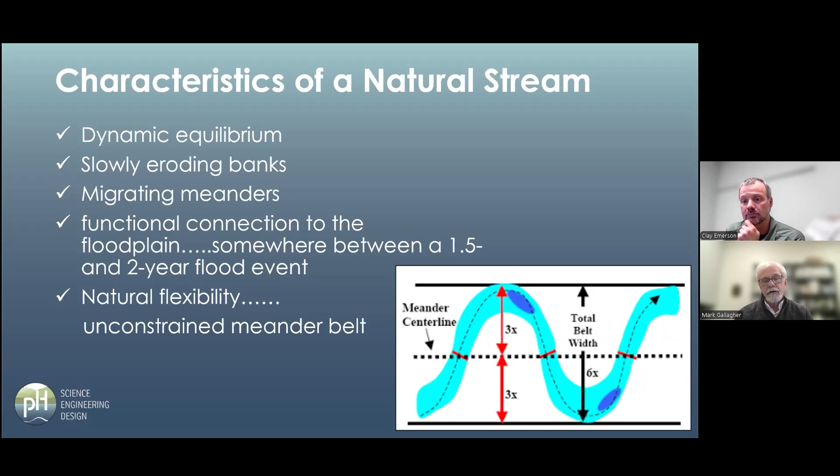Closer to home, Philadelphia has a number of these enclosed streams, which many, like 100+ years ago, they just built these somewhat engineering marvels to enclose streams that run through Philadelphia. And again, one of the major points here is it facilitated the movement of water from upstream to downstream as efficiently as possible.

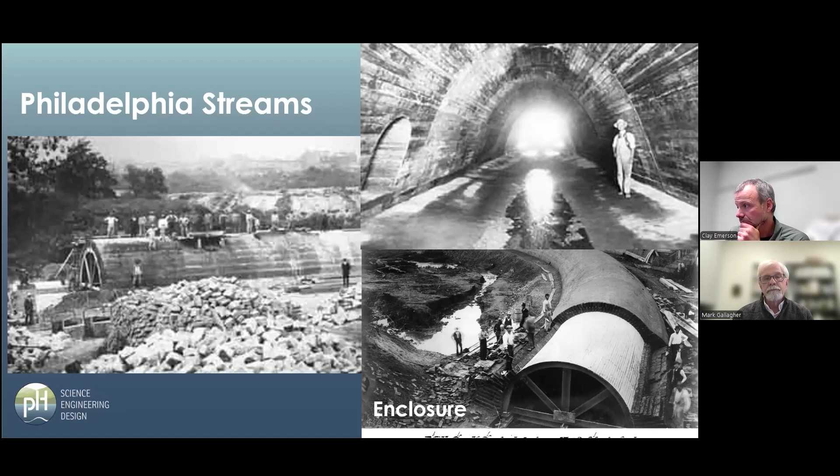We've dammed many of our rivers, which impact fish passage, impacts water quality, impacts sediment getting to our estuaries.

Legacy sediment is a problem in many parts of Pennsylvania, just from historic farming and forestry. That sediment has accumulated in floodplains, and the disconnection between the stream and the floodplain is many times due to the accumulation of legacy sediment.

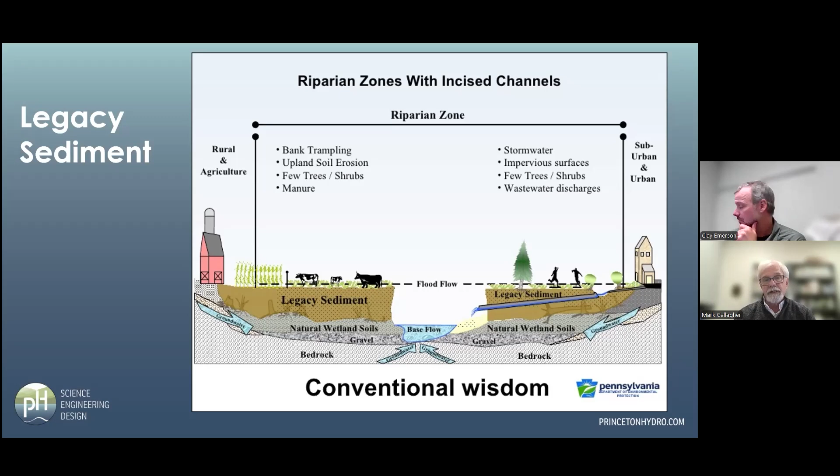In urban streams, of course, with any urban stream, the best thing to do in the past was to fill the areas in, the wetlands or floodplain adjacent to. This was a common practice to create more desirable land by eliminating wetlands or filling in the floodplains to create developable land adjacent to streams. And in many cases, just filling in the stream like you saw with the pipe stream in Philadelphia.

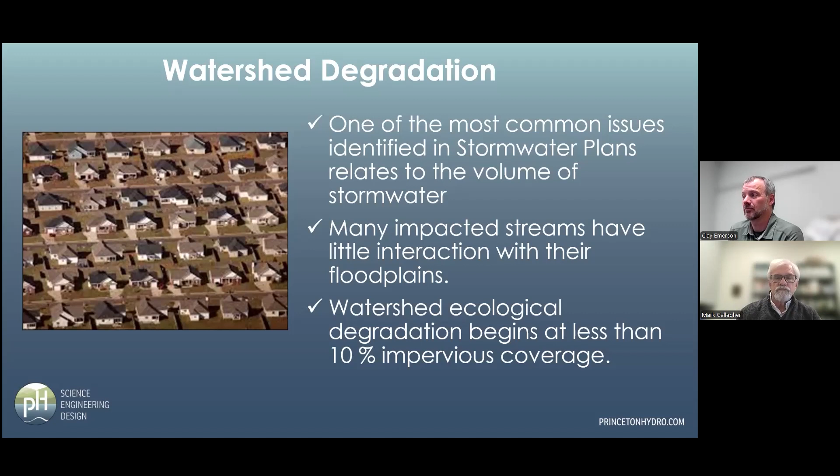I'm just going to go through a lot of the little things that are like death by a thousand cuts. Even now, Pennsylvania does not regulate streams that drain less than 100 acres if there's no adjacent wetlands. This is a headwater stream in Bucks County that had some development issues, and DEP just said it only drained 75 acres, we don't really care.

Those are the kind of issues - those headwater areas really provide the foundation for the streams below them, and that's really where all our streams form. Losing those headwater areas creates a domino effect, where everything after that is worsened by modifying those headwater areas.

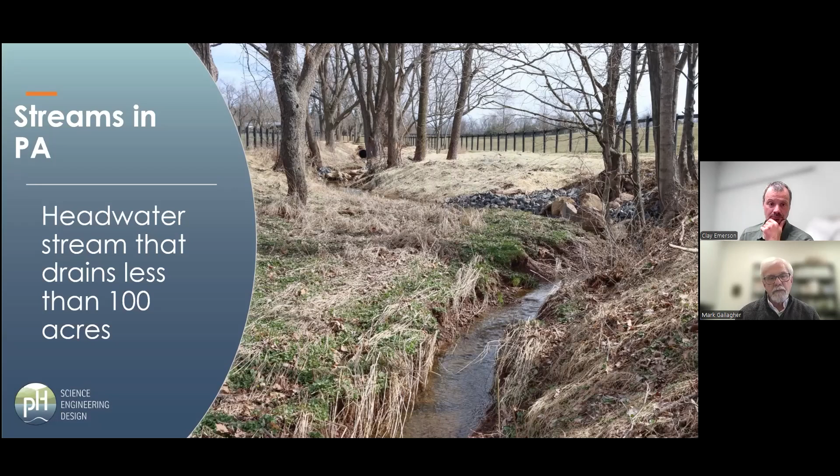This is one just outside of Washington, D.C. One of the things that is really a clear telltale sign is anytime you see roots growing in the air - that represents a loss of soil. Roots don't grow in the air. So for those roots in that tree with the pink flag on it, that 3 or 4 feet of root extending out over the stream channel - the bank used to be at the tip of that root, and all that soil is gone. In this case, in the Chesapeake Bay, just that amount of soil alone...

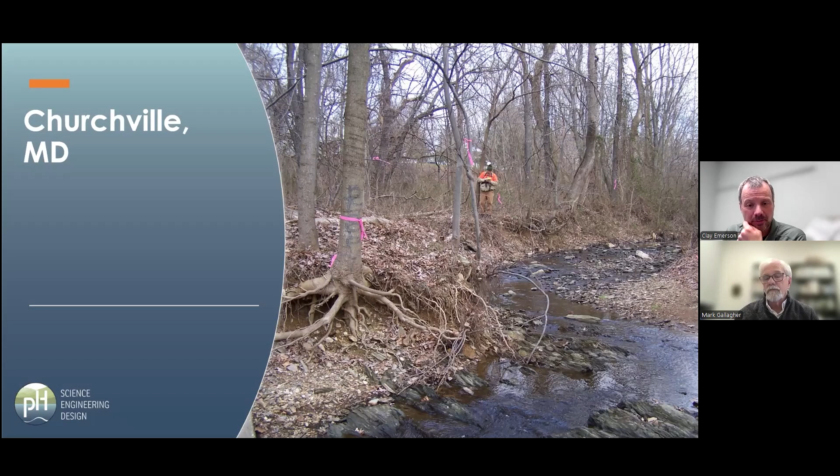That's when we start to talk about nutrient problems in our receiving bodies of water, like lakes, ponds, or bays in this case. In this example, you can see that stream is downcut all the way to what looks like a bedrock outcrop in the center.

Just another example of downcutting, and again, this is related to that issue of excess stormwater volume.

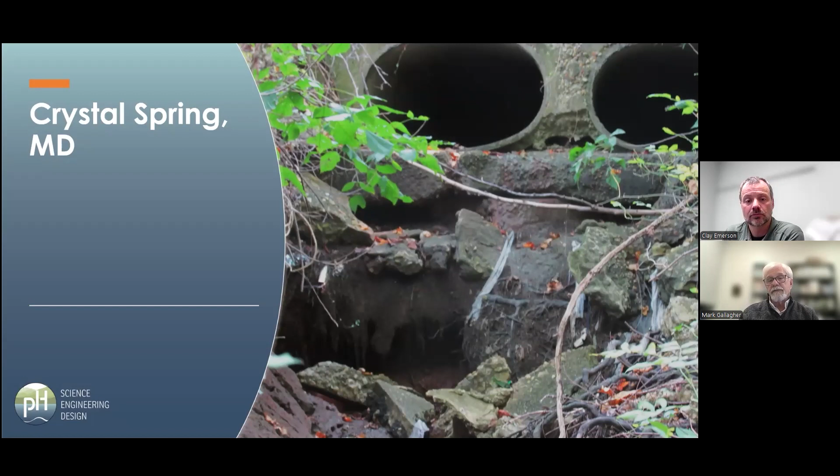This is a common practice or common scene - we design these culverts and put riprap scour protection at the down-gradient side of the pipe. But after a number of years, it's not uncommon to see that those areas have eroded and that riprap or stone protection is gone. In this case, it was probably a 4-foot drop from the end of that pipe to the stream channel.

So this is what I was saying, that excess volume has made a lot of our stream channels very unstable, and the meandering is not slow anymore. It could be pretty rapid as they try to find a way to stabilize themselves, either by dissipating that energy by deepening the channel or widening the channel - in some cases both.

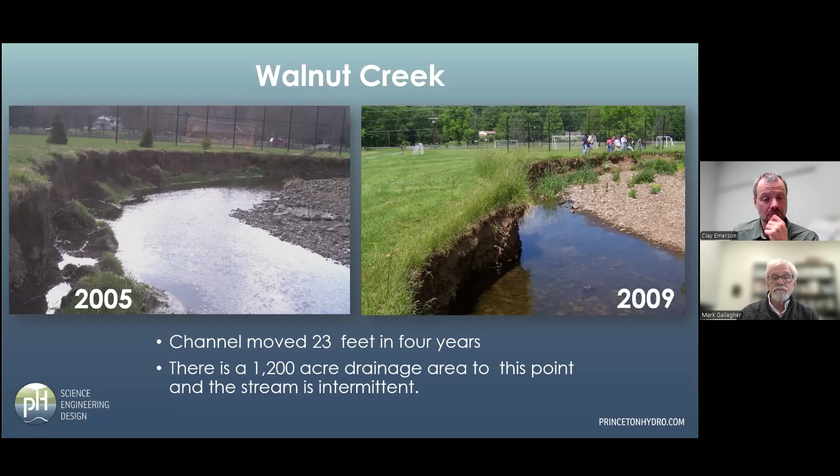So that brings us to the question of what we can do. I'm going to hand this off to Clay, and he's going to talk about some ways you can help reduce the volume of runoff that gets to the streams, and how even property owners doing little things can help reduce that volume. Later we'll talk about some restoration methods to reconnect streams to their floodplains.

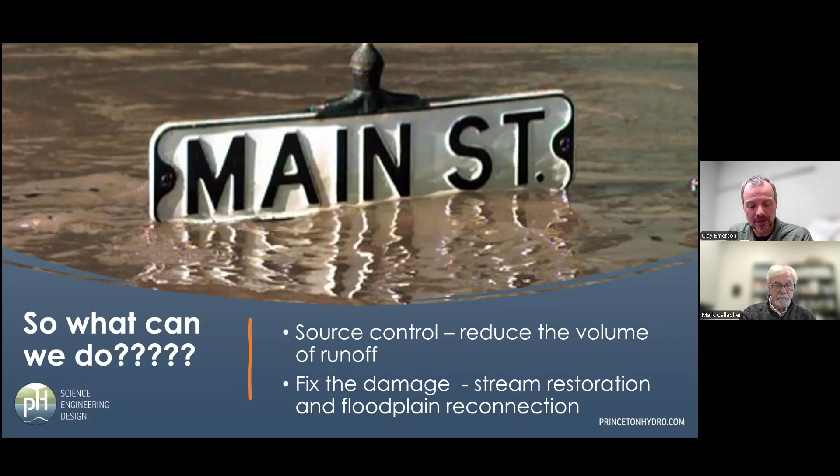We think that functional infrastructure doesn't need to look like a basin or a concrete box. You'll see a theme in these later projects of really trying to use the form and function of natural systems to achieve these goals.

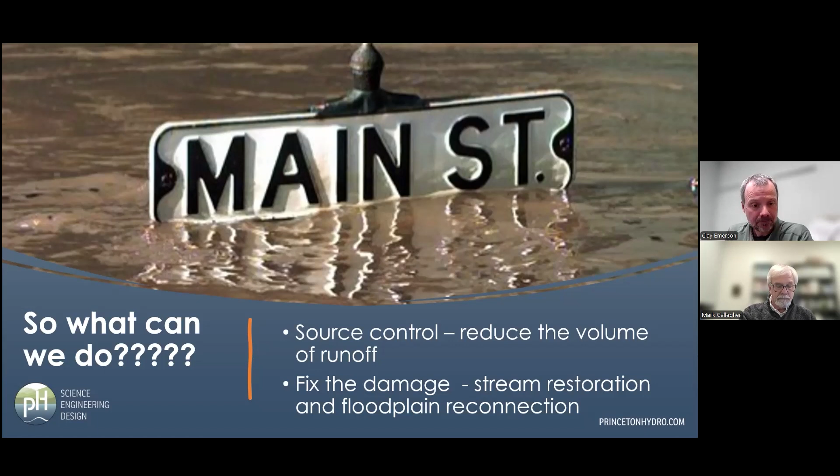I like to talk about the evolution of stormwater because it ties in with what Mark said about the volume of runoff. In just our lifetimes, we've seen this transition or evolution of stormwater management, at least in Pennsylvania and the Mid-Atlantic. We went from piping runoff directly to the stream, getting it there as quickly as possible.

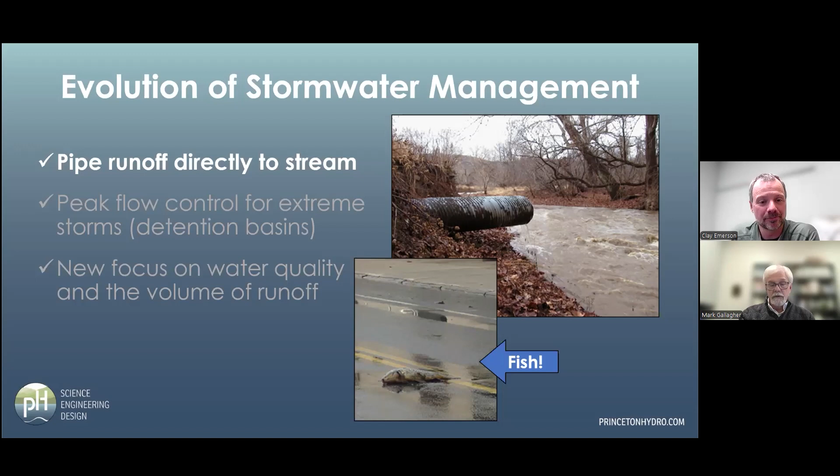So it encompasses everything—it's got the source of the problem and the effect. A friend of mine took this in Manayunk, a little downstream from here. We now have a new kind of roadkill: a common carp that didn't make it across the road. So what do we do about it?

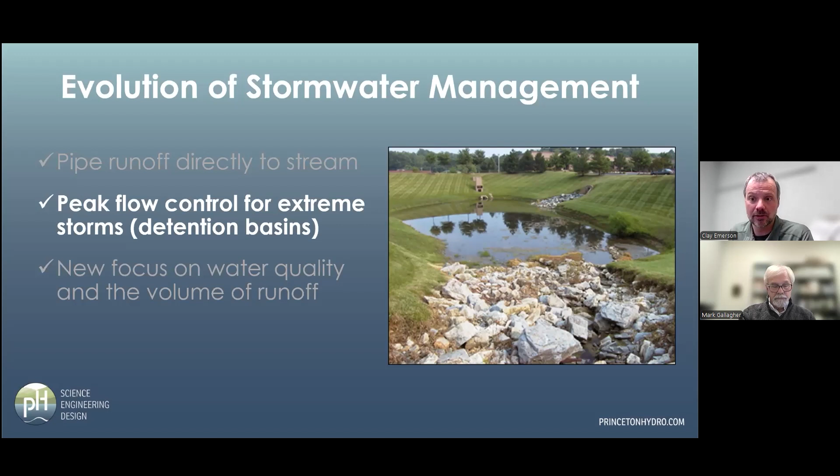This problem was recognized in PA, and I won't belabor this too much. This probably isn't what you necessarily want to hear, but if you drive around your community you'll see a lot of large stormwater basins—this is one in the Valley Creek watershed—built to meet regulations that don't exist today. We have much more comprehensive regulations now, but these started popping up in communities in the early 80s, maybe even a few in the late 70s.

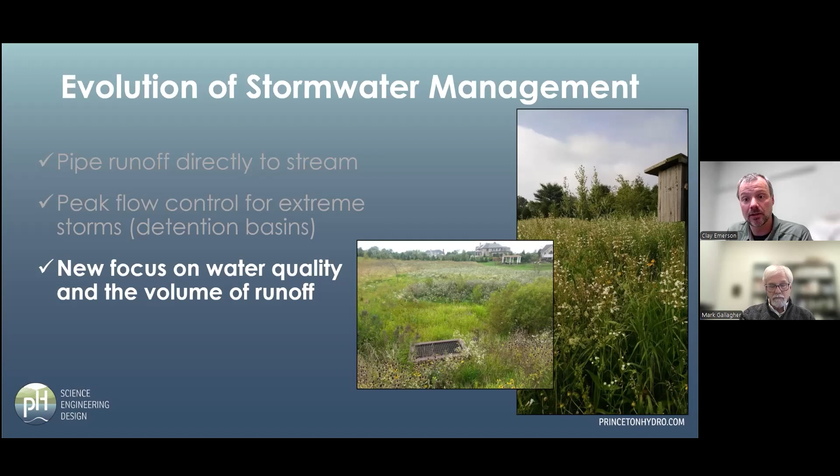But we have a new focus on water quality, and most importantly now we have rules and regulations, especially in Tredyffrin Township, that require addressing the volume of runoff. This is an example project in Chester County that, again, is a basin, but to the property owner and adjacent neighbors, they can't differentiate this stormwater basin from a natural meadow, which is what they wanted. It still does what it's required to do, and it does it better than a standard basin would.

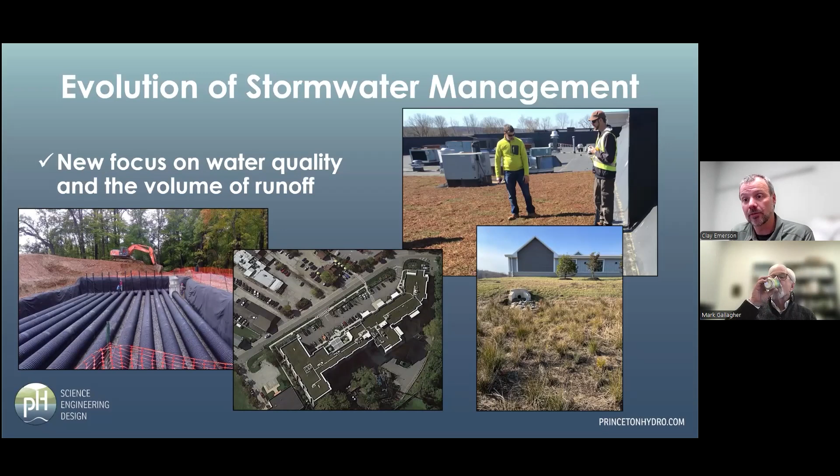One of the things Mark pointed out in that earlier slide, with the basin in the foreground and the couple large homes some distance apart, is that we've all kind of become riparian property owners. And I don't mean that when you hear the term riparian property owner, you think of someone who lives along Valley Creek or some waterway—though that's certainly what the word riparian means.

But if you look at this little screenshot of a portion of the township, the network of roads—whether it's the more dense townhome development or the more typical residential development throughout Chester County—there is always a series of inlets, curb and gutter lines to inlets to pipes, perhaps to basins depending on the age of the community.

And there's often a piped discharge to the stream, because that's generally how things are designed. So the suburban landscape that we live in and enjoy shows evidence of this evolution of stormwater that I went through in the previous three slides. Here you can see a forested riparian buffer of sorts, and you can tell there's a stream meandering through here, but there are a lot of outfalls along the way.

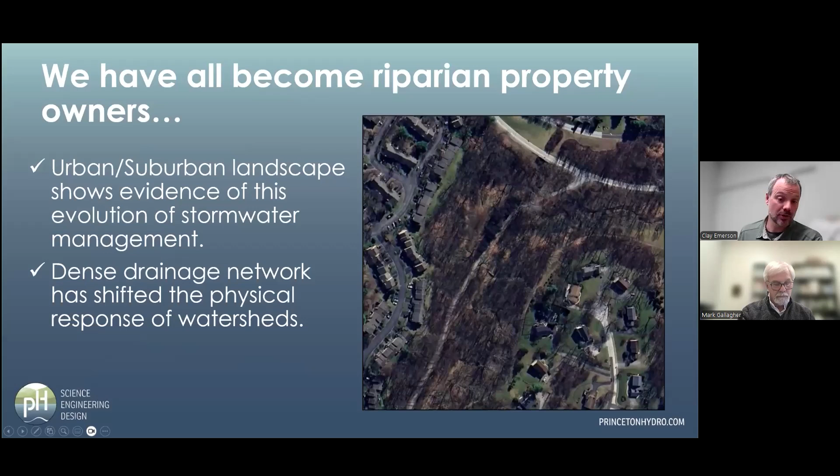So, downspout disconnection. In the previous image, I pointed out a home—I don't know if you can see the pointer here—but if this person's downspout currently goes into their driveway, which goes straight to the street, it never has the opportunity to infiltrate. Simply redirecting a downspout can break that connection, and in the smaller typical storms, maybe that runoff will never actually make it to the stream. It will be allowed to infiltrate. Everyone's heard of rain gardens.

I tried to pick some examples here that didn't include those. I'm a big fan of rain gardens, of course, but I tried to pick some different examples that you haven't seen. Yes, you can build a rain garden, you can probably do it yourself—there's a lot of good guidance out there on generally how to do it, plant selection, and you've probably, if you're on this presentation, seen one of those before.

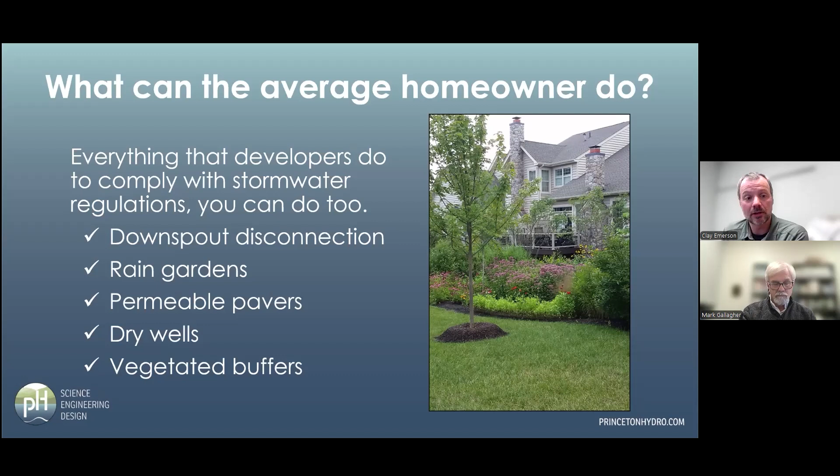But there are other things—some more structural, or improvements like permeable pavers, dry wells, vegetated buffers. I should point out, I mentioned the Tredyffrin Township ordinance before—even smaller on-lot developments, depending on how much impervious cover is proposed, are also required to do stormwater management. So in a lot of communities, including Tredyffrin, even small improvements at the lot level will actually require some of these things.

Here is a really nice, quick, self-contained example of a more developed area in your community in this part of Chester County. You have areas that are more similar to some of the images Mark showed, typical lower density suburban landscapes, but you also have some semi-urban areas, like the Paoli section and other areas. So you can do things there too.

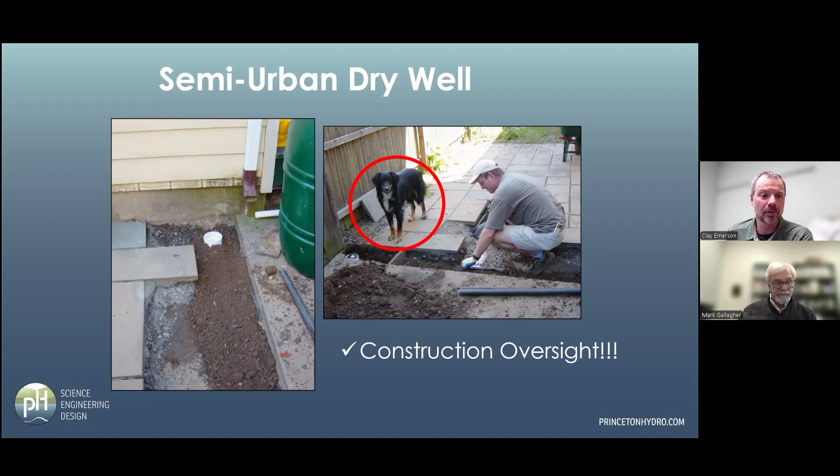Importantly, this homeowner has construction oversight, making sure things are done right, as this person here is connecting their downspout to a new drainage pipe and taking that runoff away from the foundation and basement, and putting in any number of different manufactured storage units that just makes a place for the water to go temporarily.

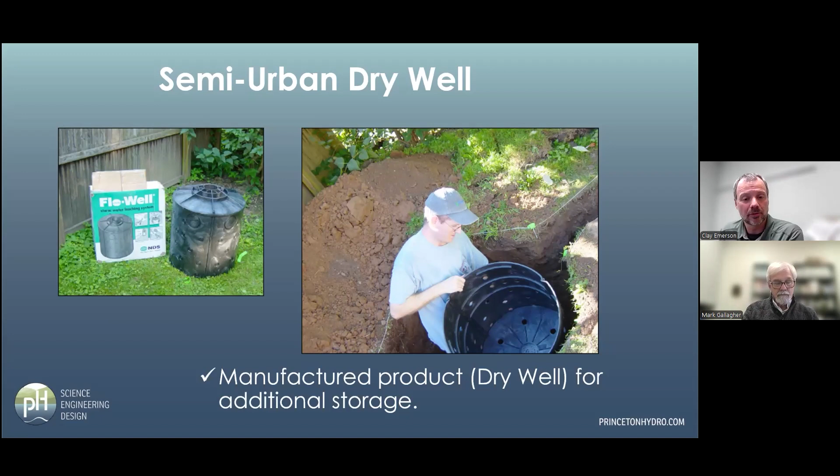So rainfall from the rooftop that used to go to the patio and probably create an issue there, especially in winter, on days like this, now goes underground to this empty space before the storm system that allows it to soak into the ground in between storms.

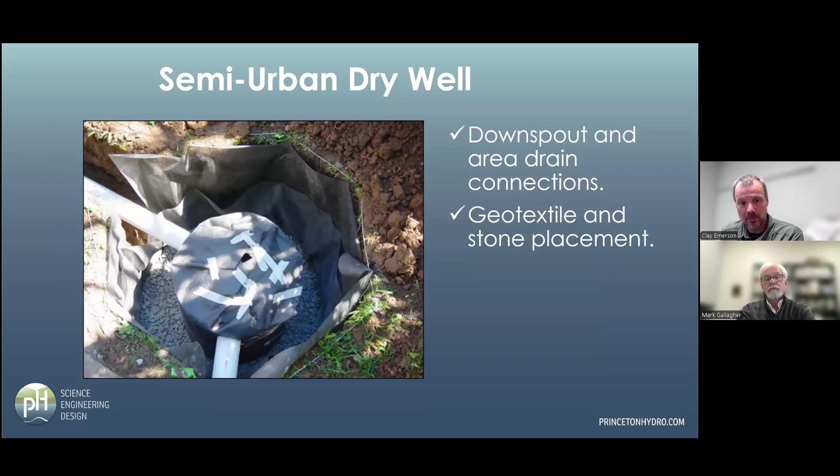In this case, this person in particular is kind of adventurous and did this himself, but it's not a terribly heavy lift. Just a simple series of PVC pipes, collecting that water from the downspouts, bringing it to this subsurface system, some fabric, some clean stone, and you can get an idea of the scale there.

Yes, these things can be sized. They do need to have an overflow. There's some other design considerations, but anything is better than nothing. If you're installing one of these because you have to, then the sizing is obviously much more important and would be carefully dictated and reviewed.

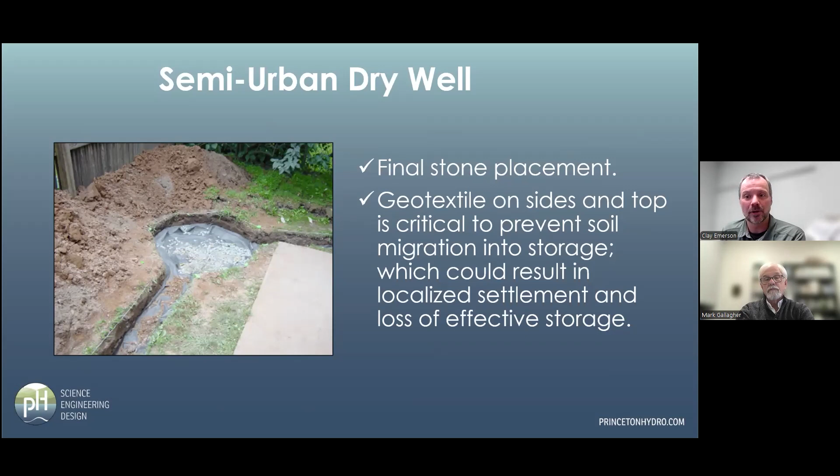But it's a simple process. It's not rocket science, it's some basic pipe. It's not much more than a trip to your local hardware store.

Permeable pavers. In this instance, a kind of unsightly old standard concrete patio is being replaced with permeable pavers. If you haven't seen these, this is a close-up of them on the pallet, and you can see they're really just regular pavers, made of the same material as standard pavers. The only difference is they have these nubs, these little bump-outs that line up with one another and maintain, in this case, about a half an inch gap, maybe a little less, between pavers.

So they don't quite butt up against one another. That space is filled typically with some kind of clean, very small diameter, uniform stone that aesthetically looks fine, pleasing, but allows water to soak through readily.

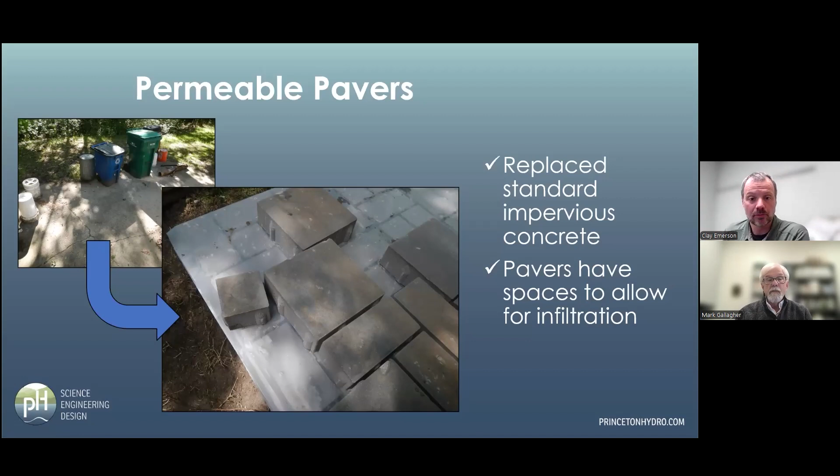They're usually accompanied with a stone subbase, which again, just like that black garbage-can-looking thing, that dry well in the previous example, just gives that runoff a place to go during the intense portion of the storm. In the hours, and usually 3 days to a week following the storm, that runoff can infiltrate into the ground and not make it to the stream.

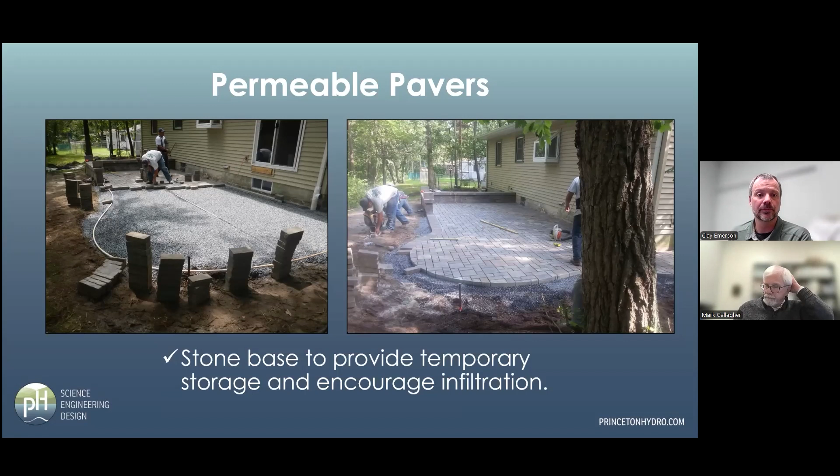In this image, there's a river just out of view here, on the left. So that impervious surface is taken out and replaced with a permeable surface along with this storage zone. And that's the finished product.

One other thing I want to show you, which will go into the next slide: you see the downspout here that used to discharge the rooftop onto that standard pavement and right towards the river, which is just in the narrow, albeit narrow, forested buffer here, is now taken somewhere else.

Instead of discharging to the patio, what this homeowner did was turn the corner, if you will, and brought that water further away from the river, solving another problem with it. They wanted a vegetated screen to separate, aesthetically and visually, their property from the neighbor's property, but vegetation needs water. So let's solve two problems with one solution here.

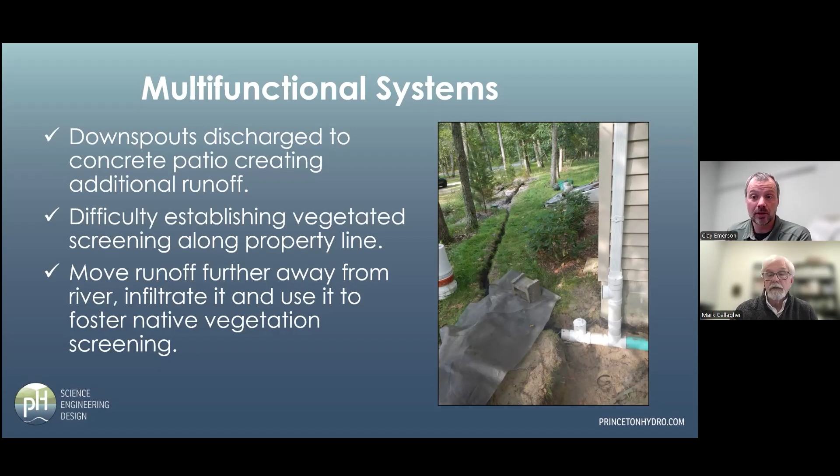Bring that runoff that used to run onto the patio and into the river over to this area where they want to establish a vegetated buffer. It's a multifunctional system: it gets the runoff away from the river, and gives the runoff an opportunity to, number one, be captured and used by the plants, and excess water be infiltrated into the ground.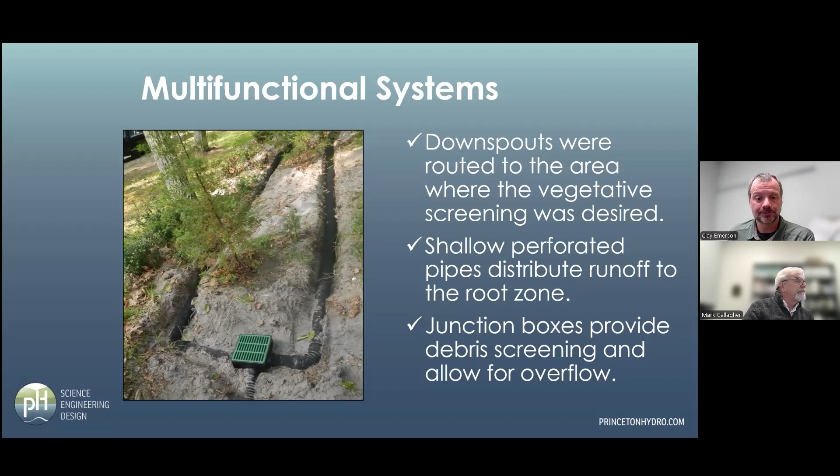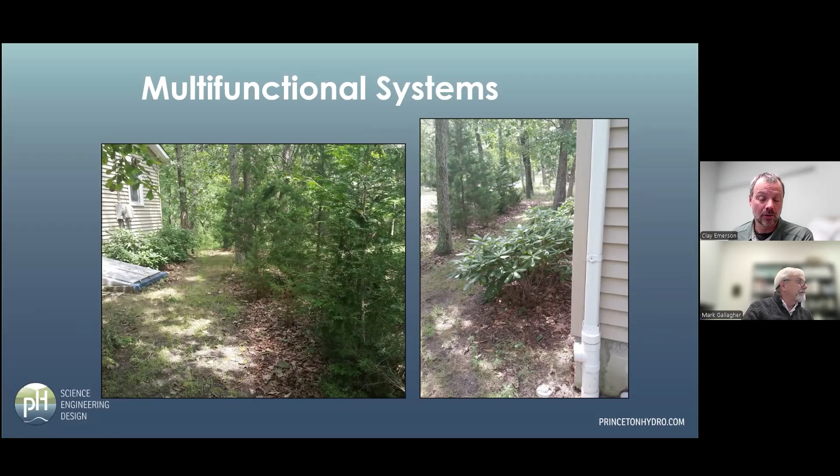And if the pipe can't keep up, it can overflow and literally just discharge to the surface here, away from the river, away from the stream, and benefit the plants here. After a year, you can see it has started to totally fill in. So the vegetation didn't need to be watered and is maintained going forward without any effort on behalf of the property owner here.

So, green roofs. I had some pictures of these before, and we don't typically talk about these on an individual lot or homeowner level. These are aerial pictures from the township of a multi-use building where the developer installed green roofs.

This is right after construction. Here they used the rollout system instead of plugs, where you build the green roof from the bottom up and then roll out the vegetation. It's kind of an instant establishment.

And you have a number of examples of green roofs: Penn Medicine right there on 202, the senior living facility I showed earlier, another building on Route 30 on Lancaster Avenue, and of course Hillside Elementary, which the township got grant funding for and has green roofs that have been working excellently. So you're lucky and unique to have a lot of those local examples. But here's the smallest scale example, bringing it down to the homeowner level, that I could think of.

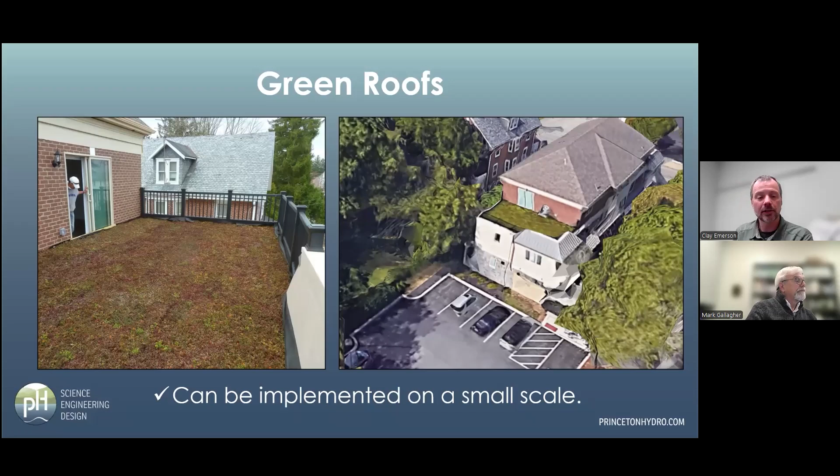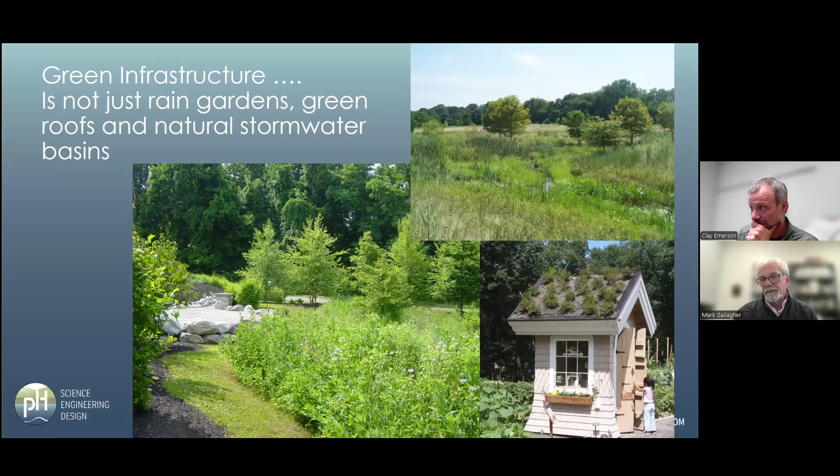Native plants—I'm definitely big on it, a huge advocate of Doug Tallamy's work. This green roof in the bottom right is from, I forget the name, the Maine Botanic Garden, and growing on the roof is all low bush blueberry. So sometimes I think we tend to follow patterns when we could be more creative.

Go ahead, Clay, sorry. So what we're going to look at now are some examples of how we can reduce runoff through restoration. There's a couple ways.

One is reforestation, naturalization—but even meadows, if you walk through a meadow after a rain, you're probably going to be wet up to your waist. That's the whole concept of rainfall interception or bioretainment. That water never gets to the ground to begin as runoff—it's stuck on the leaves, trapped there, held there.

The other way is reconnecting streams to their floodplain, which can be done either by lowering the floodplain or raising the stream channel. Raising the stream channel tends to be a little less invasive than lowering an entire floodplain, but there have been projects that did both.

Floodplain enhancement—that's what I was talking about, lowering the floodplain. You're enhancing it by reconnecting it so it actually floods as frequently as it should. And hydrologic restoration: especially in agricultural areas, there are remnant agricultural ditches all over. We don't think about it, but many of those ditches, even if they start to fill in, still provide faster conduits for water to get from point A to a stream than if it flowed naturally through a meadow or forest.

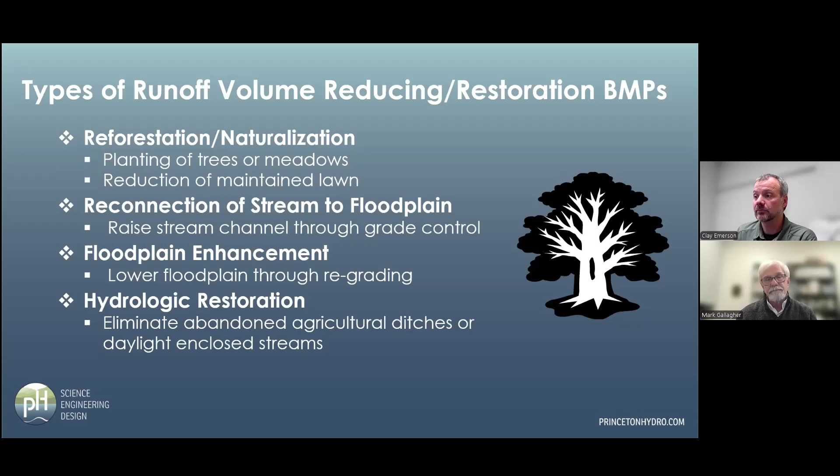This is an urban project where you can see two people in the upper left standing over a stream. It was a piped stream that, once removed—this isn't the greatest example because the pipe still continues for about a half mile—allowed for creating urban green space as well as naturalizing the stream corridor.

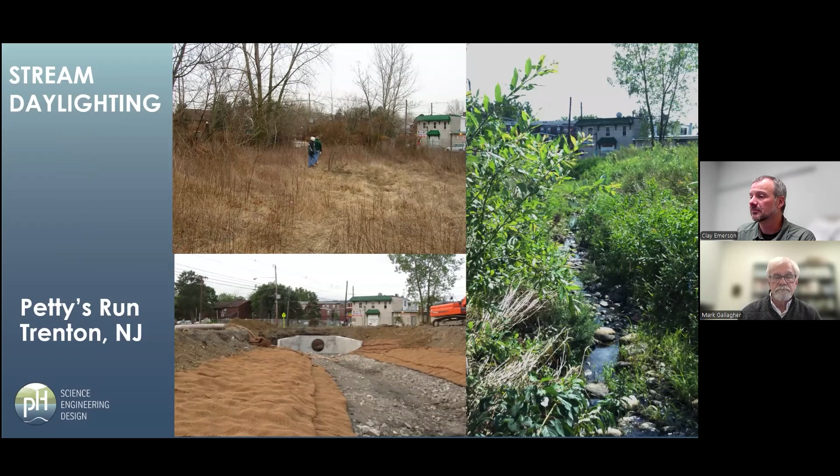This is what I was talking about a few seconds ago—one of those remnant ditches that goes through a forest. In this case, it helped drain a wetland and facilitated flow from an upgradient development through the forest to a receiving body.

One of the techniques is very simple: just plugging the ditch, moving some earth around. Usually there's side-cast material still evident even after many years that can be used to plug the ditch.

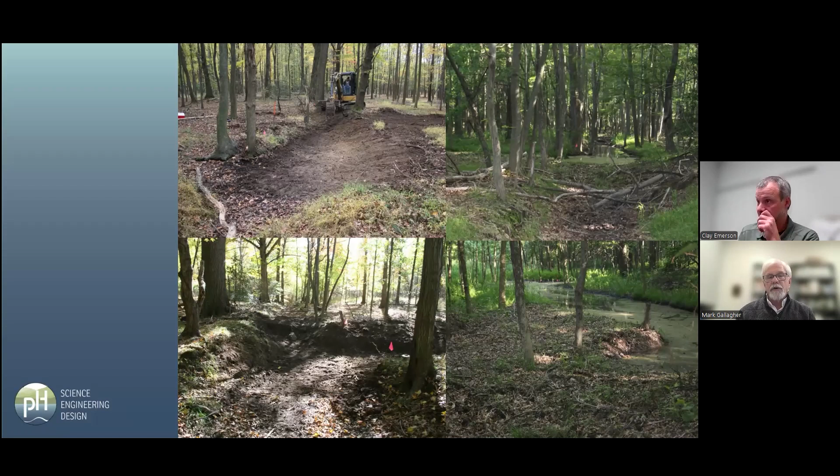In this case, it was a project that looked at extending the hydroperiod of a series of vernal pools that were drying out too quickly, as well as getting rid of a ditch and retaining that water for a longer period—first, to take that excess volume away from the downstream stream, and second, to extend the hydroperiod of these vernal pools so organisms can go through their whole life cycle.

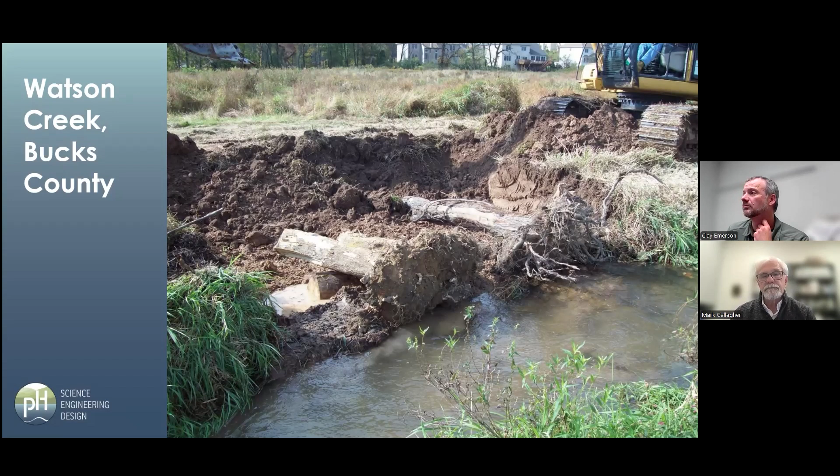Eventually, not in this picture, but soon. Not in that picture. No, we've got some time.

Just planting trees, and again, focus on native trees. They can be really important for intercepting precipitation.

Many cities like New York, with their million tree planting program, that's the whole purpose - how we could minimize runoff. Planting trees is an easy way and a very popular way to reduce runoff.

One healthy large oak can intercept 27% of total precipitation in an area. It sounds like a lot, but when you look at some of the big trees, especially more open grown trees, they have a lot of leaves and a lot of layers just within that tree.

These can be just very simple, straightforward ways to reduce the amount of runoff that goes to our streams and help improve the quality of our streams.